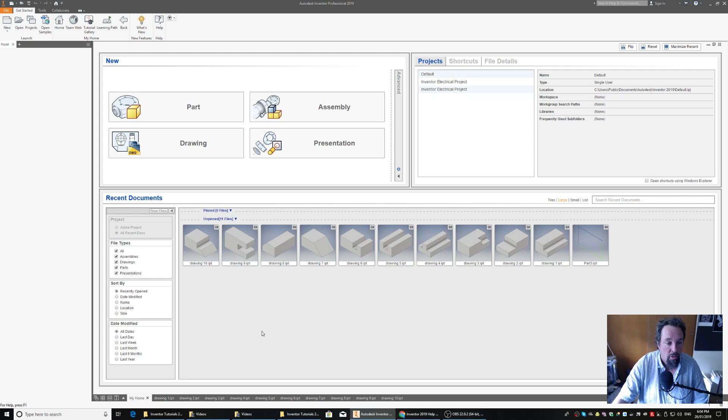So here we go. Going back up to the top to New, Metric, Standard Millimeters, Create. Going back up to the top left hand corner again for Start Sketch. Coming over and selecting the XY plane. So I'm going to draw the L shape, and I'm going to deliberately make sure my L doesn't look anything exactly like my final drawing. That way, as I put my dimensions to it, it's going to change and I'm going to see the physical changes. So here we go.

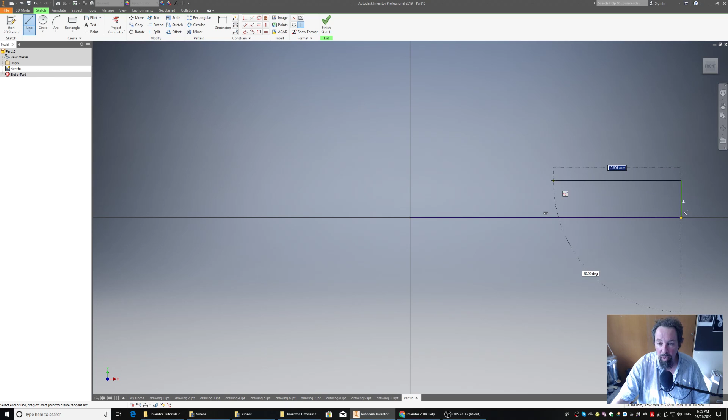Select the line tool, that's up in the top left hand corner next to where I hit the sketch button. Come down to the origin, remember it goes green, click, draw an L shape, and as I say, it's deliberately not going to look anything exactly like my finished product. As we come over the center here, you'll see it clicks to it, and then back to our origin, which is a green dot. So there we have an L shape. So I've got my basic shape there.

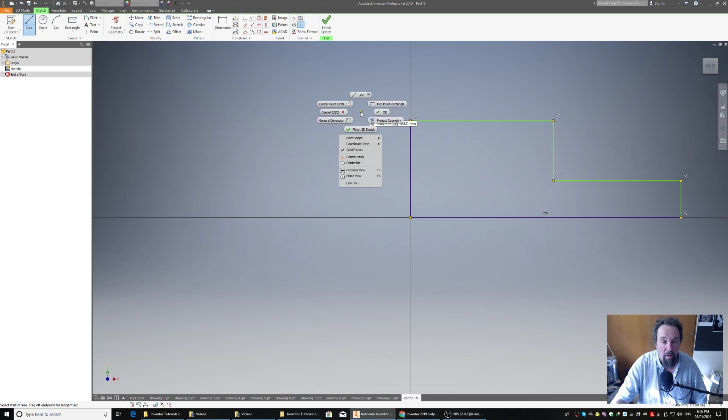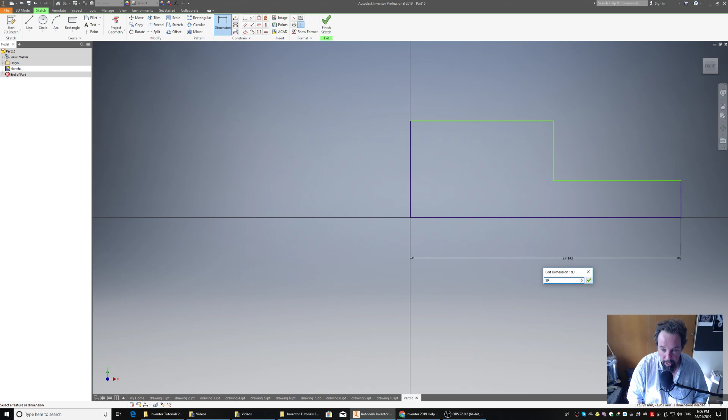Now I'm going to use the dimension tool to make it the accurate sizes. So dimension, I know from this side to this end is my long end. On my drawing it says 50 millimeters, so I'm going to type in 50, enter. Now remember, I can't see my drawing anymore, so I'm going to go back up to my drawing box up here, select front and click on front once. That's a left click, and that will center my drawing so I can see it again.

I also know from my drawing the size of this leg here, which happens to be 30 millimeters. So I'm going to go left click, left click, left click, 30, enter. So now I've got to find out what size I've got in here. Looking at my drawing, I can see the gap, it tells me this distance here. So I can go left click, left click, left click, size is 10, add that in. It tells me the size from this edge to this edge. So left click, and left click again.

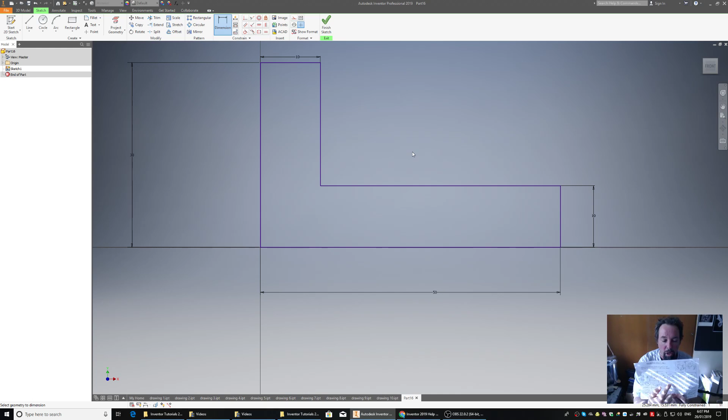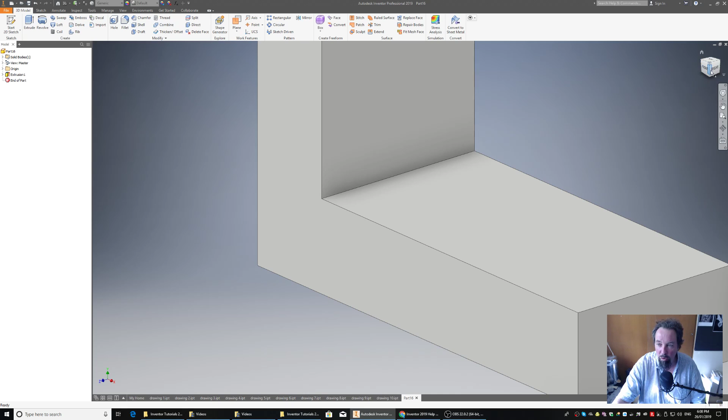10, enter. So now I can look at my profile and go, yes, it looks fairly similar to the profile I have in here. So I'm making sure my L profile looks fairly similar. Now I'm going to finish that sketch. I'm going to extrude it by 20 millimeters because we know all our blocks are 50 by 30 by 20. I can't see my block anymore, so I'm going to go back to my drawing cube, click on the corner. Now I can see it.

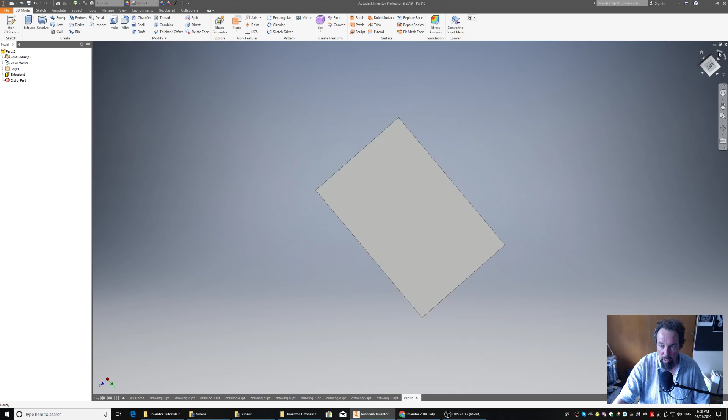Alright, I can see on the drawing that I've got to put the notch on this edge here. So I could rotate it and then draw it from the other face, but I also know that it's got to go from this corner here, so let's orientate it so it's the same as on our board. So right click up there. So now it's orientated, not quite. Okay, get that around there. Around and around. So now I have my block in the same orientation as my drawing.

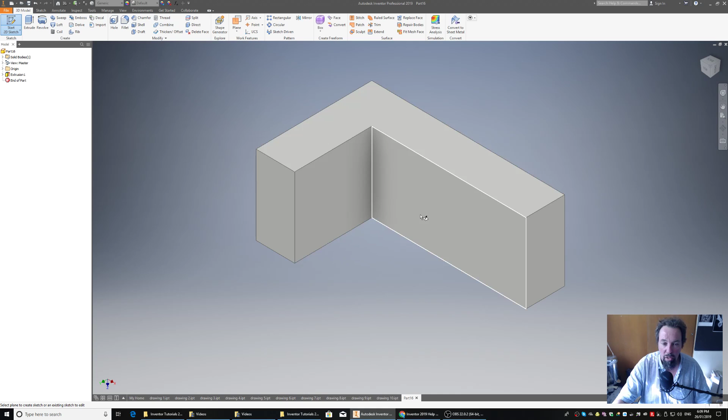As the drawings get more complex, having your drawing on your page the same orientation as on your drawing here, that will help. So I know now I've got to remove this section out of here. I've got to put a rectangle in here. No dramas, we've done that before. We go up to the left corner and go start sketch, select the face. This is the face I want to draw it on. Click on it.

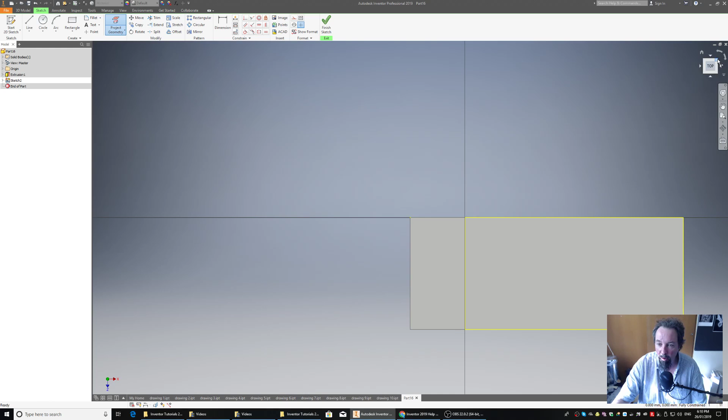Now this is where I find the project geometry to be really handy. So I'm going to go back up to the center, find my project geometry button, come down. This is the face I want to draw on, so that's the only one I'm interested in. So I don't have to project the geometry on all the parts, just on the part I want. So I can see my yellow border shows me what part I'm on. And if I go back to there, I can see, yes, I'm on that part. I'm definitely drawing on the right part of my drawing.

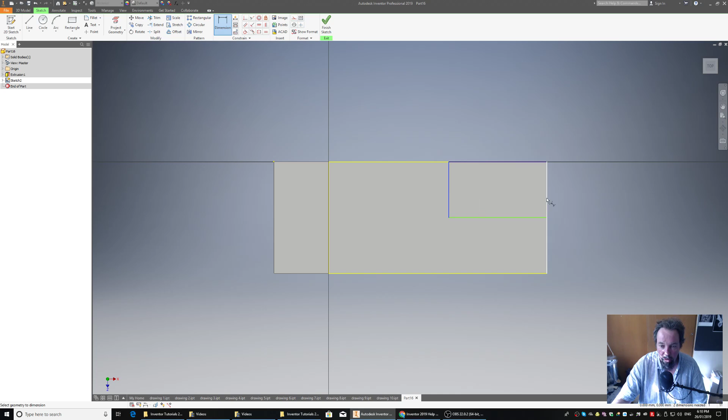I'm going to select the rectangle tool. I'm going to find the corner. Remember, it'll go green. And I'm going to drag it. And if the drawing tells me the sizes of it, and it doesn't, that's okay, because I'm going to use my dimension tool now to go from this edge to this edge, because it tells me on my drawing that it has to be 20 millimeters. Enter.

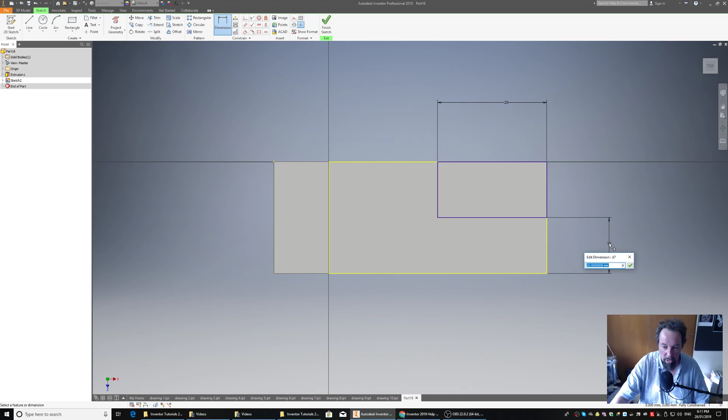And on my drawing it tells me the height from here to here. So height from this edge to this edge has to be 10. Enter. Locked in. Finish sketch. So now I've got my rectangle in the right spot. What am I going to do? I'm going to go to my extrude tool. I'm going to use the cut function, the second function. So extrude tool's up next to where we did our sketch tool. We want to cut. We're going all the way through, so we go all.

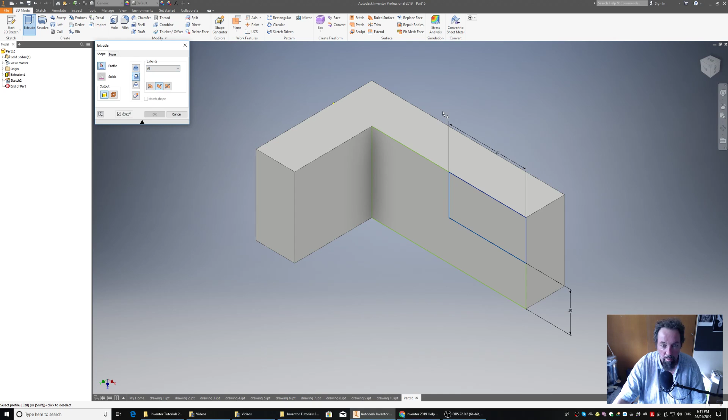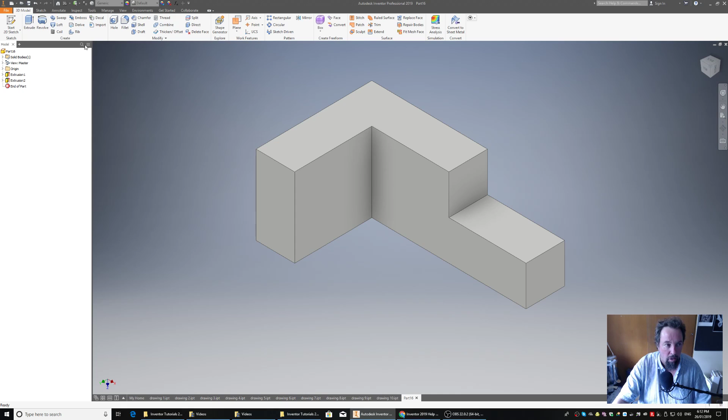And now I find the shape. So you can see as I go over the shape, see how it changes color? Click on it. It gives me an indication of what I want to happen. I'm checking that against my drawing. Yep, that looks good. So I go okay. Checking it against my drawing, it looks the same. So I'm going to go File, Save As, Drawing 11.

Save. Somebody kindly pointed out that in my last tutorial I forgot to say save as at the end of my drawing 10, but I did do that at the end, so I do have drawing 10, and you can see that down the bottom here. Drawing number 10 is down there. And that's another thing, as you do your drawings, they should pop up along the ribbon along the bottom here, so you can see where you're up to, and if you scroll over them you'll get a thumbnail of what they are to know which ones you've done.